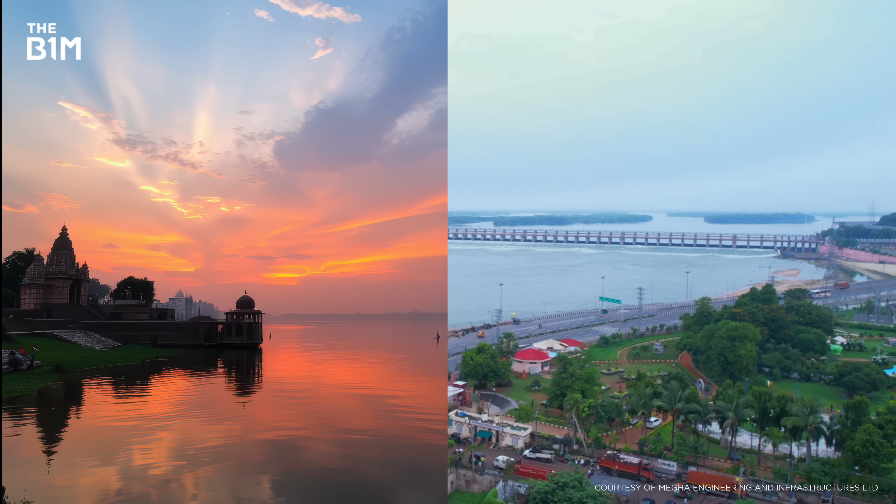This is Andhra Pradesh in India. One of the largest states in the country, it's home to more than 50 million people, 2 enormous rivers, and a thriving agricultural industry. But it's also known for a pair of problems that you wouldn't expect to find in the same place: catastrophic floods and searing droughts.

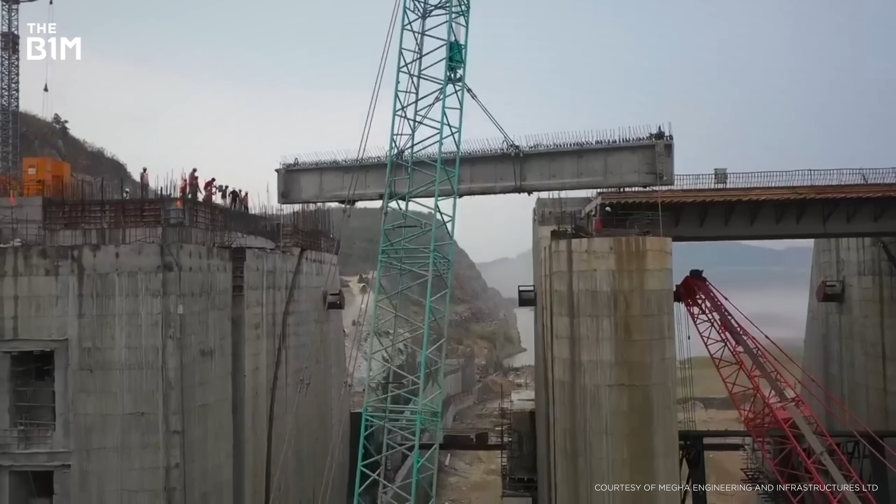For nearly 100 years, engineers and governments have been trying to build something remarkable to address this critical issue. A gigantic project that would transfer water between floods and drought-prone areas, so there's always the right balance. From a record-breaking barrier to a hydropower plant and sprawling canals, the result of a plan that's been around since the Second World War is now in full swing.

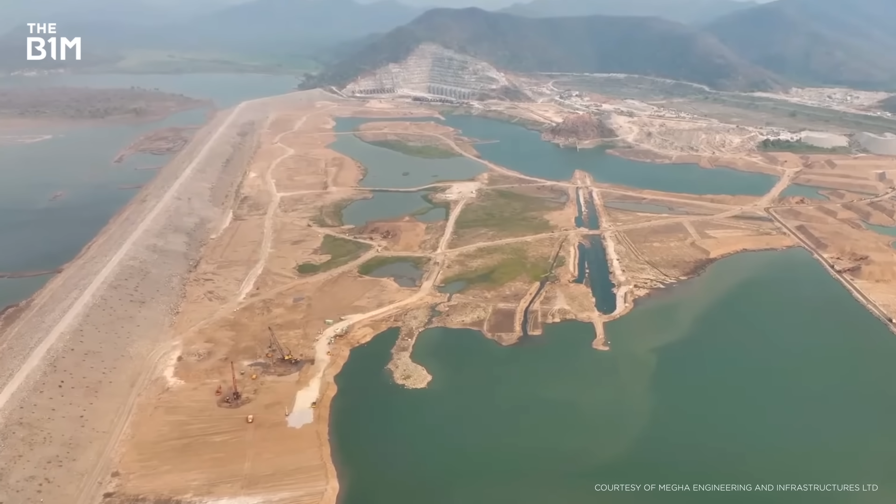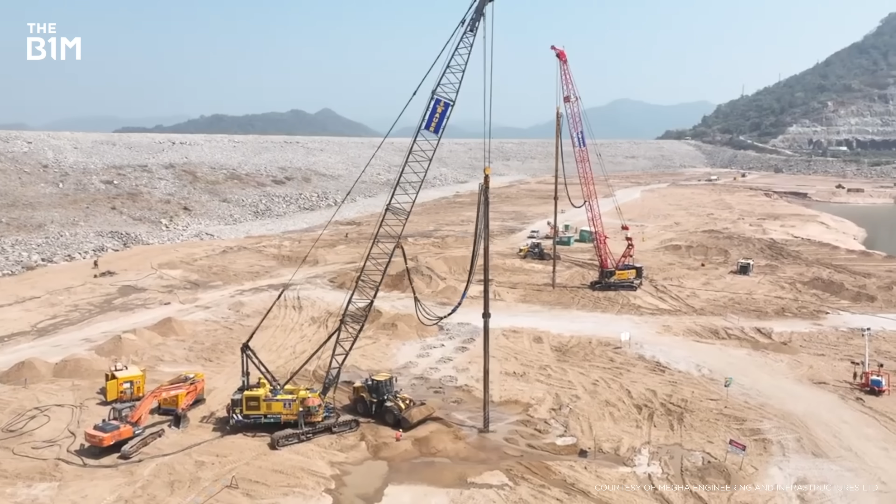But as incredible as it might seem, work here has been tough going. Natural disasters, political clashes, and land acquisition challenges have set this project back by decades. What started out as the lifeline of the region has, at times, looked dead and buried. But now, all hands are on deck to finish a mega build that's already been making some serious waves.

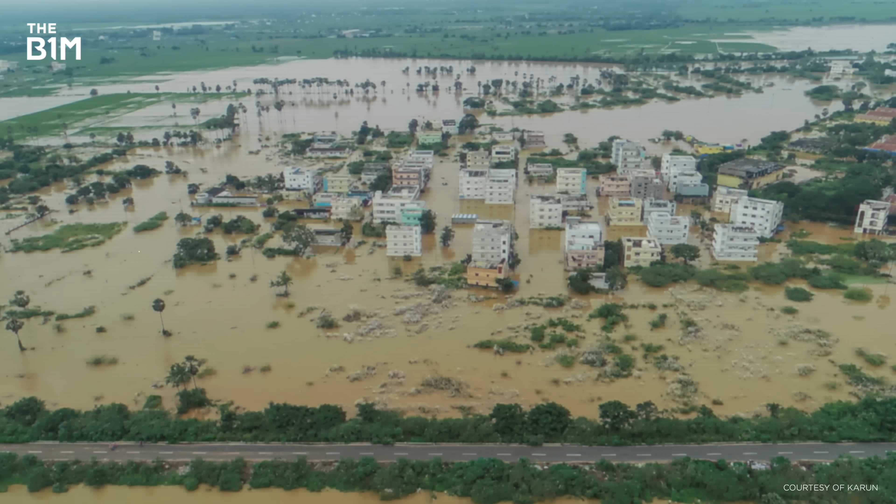Extending for almost 1,000 kilometres along India's southeast coast is Andhra Pradesh. A leading producer of rice and tobacco, the state is highly dependent on the weather. In a tropical monsoon climate like this, however, atmospheric conditions can be extreme. In the central and eastern parts of the region, almost 800,000 hectares of land experience regular flooding. That's an area 5 times as big as London, and in the last 2 decades, things have only gotten worse.

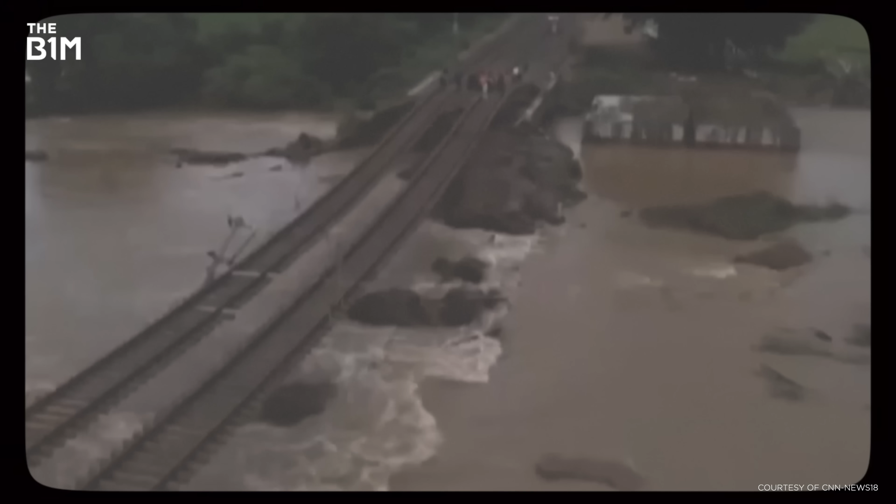2024 saw a flood so devastating that dozens of lives were sadly lost. But meanwhile, there are severe droughts to deal with too. 4 districts further to the west have seen years of sparse rainfall, leading to a decline in crop yields and a lack of drinking water. So we've got one place where there's a surplus of H2O and another where it's in very short supply, all within the same state. If only there was some way to balance this out.

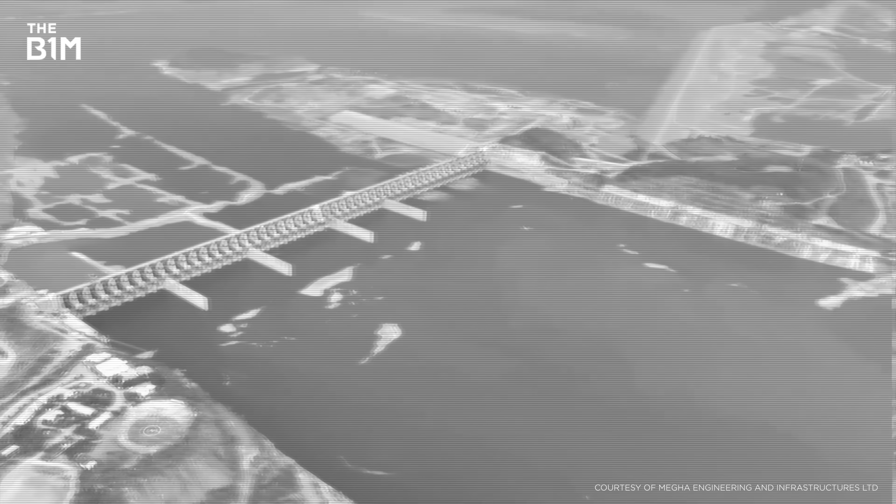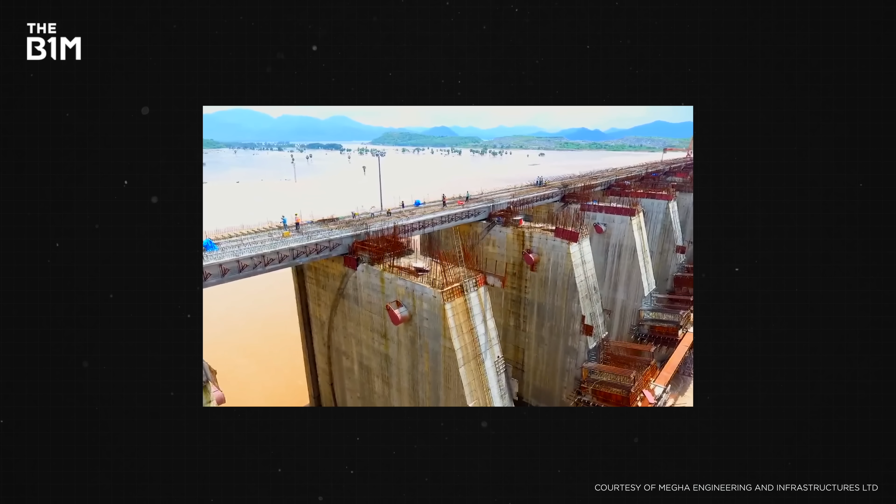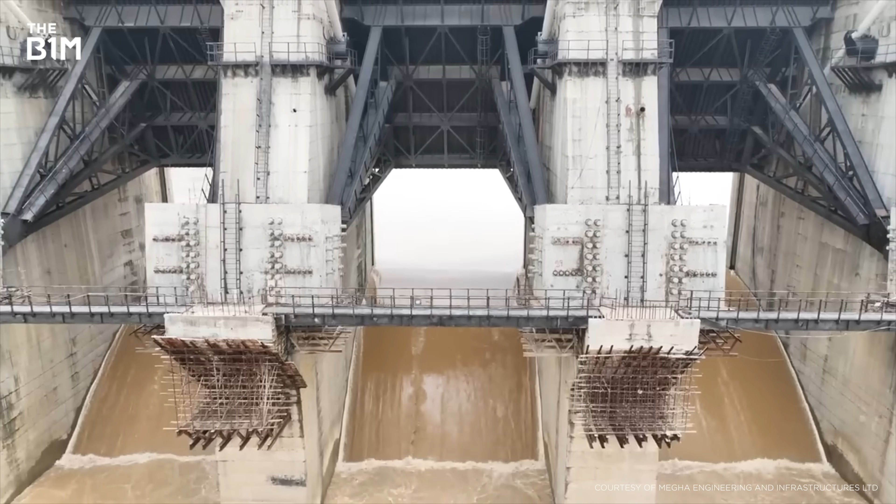Enter the Polavaram Project, stretching for more than 3.5 kilometres across the Godavari, India's second longest river. It'll provide 720,000 acres of land with much needed irrigation, stand as a powerful flood defence, and generate a huge amount of power for the area. This incredible new piece of infrastructure will effectively control this key section of the river. With it, water can be transferred out when levels get too high towards areas that don't have enough water. Now, heads up, there are several parts to this project and all of them are pretty massive.

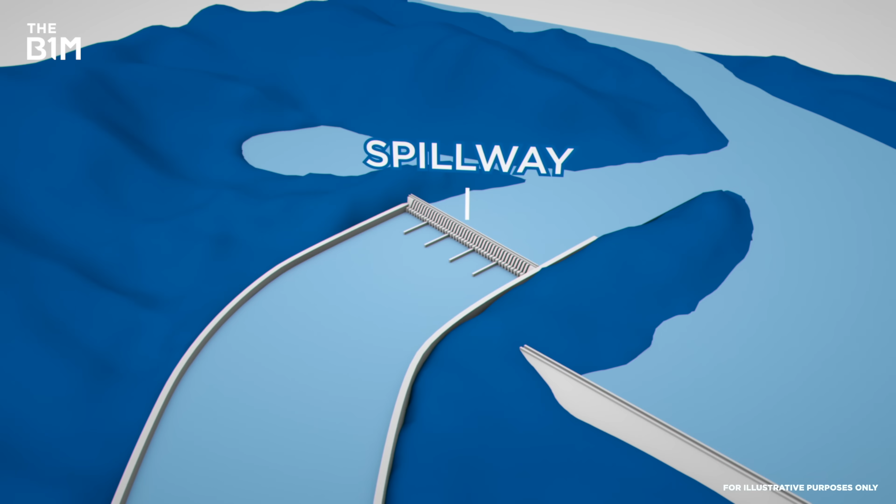We're going to start by looking at the one that's most easily visible, the spillway. More than 50 metres high, it's an immense barrier equipped with 48 hydraulic gates that can let water pass through if necessary, like when flooding is imminent.

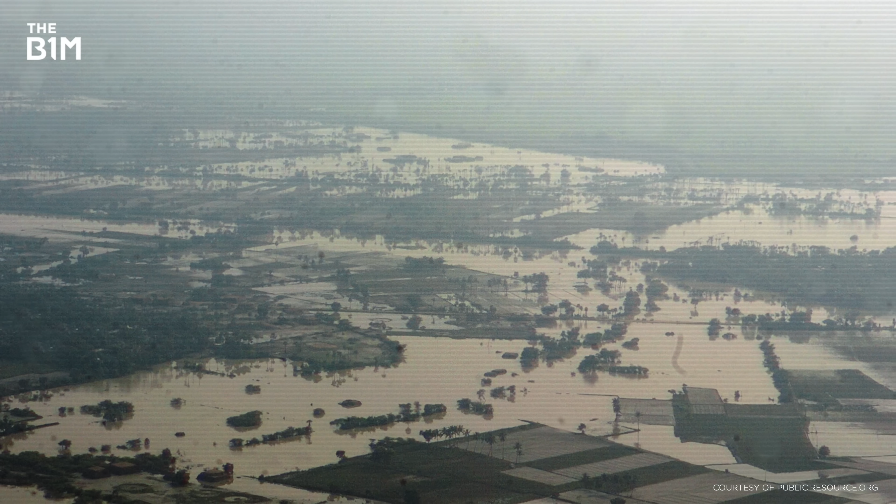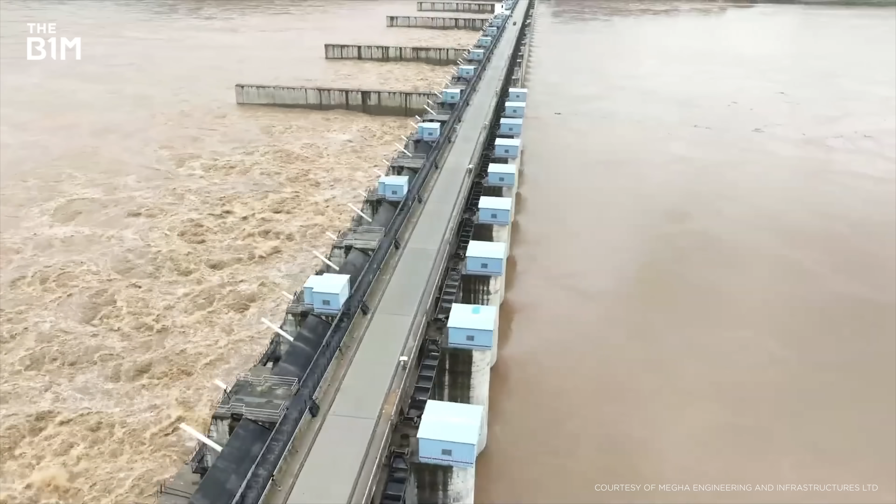And because these disasters can get pretty intense, particularly around the Godavari, planners haven't taken any chances. The structure is built to withstand and protect against the biggest floods possible in the region, the kind that would only be expected once in a millennium. Its discharge capacity of 5 million cusecs is larger than any other spillway on Earth.

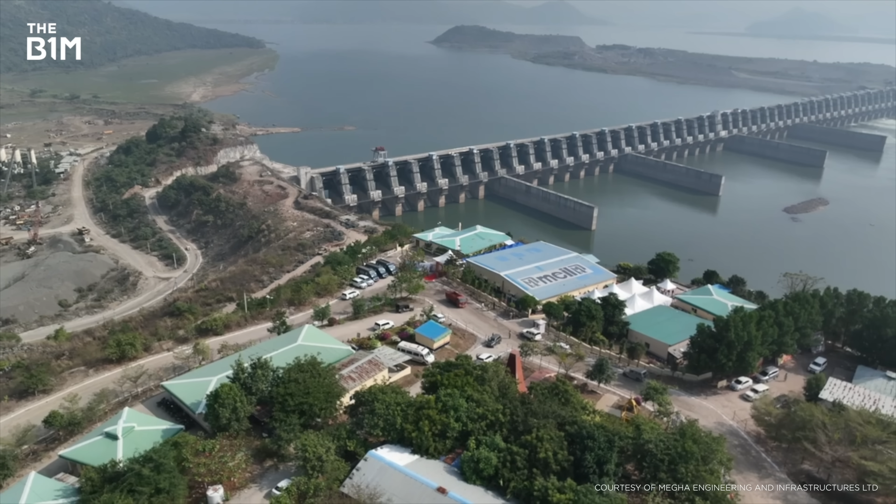In case you need reminding, a cusec is a unit of measuring water equal to 1 cubic foot per second. Measuring just over 1,100 metres horizontally, it's the largest spillway in the world, even beating the one on the Three Gorges Dam in China. Another record was broken during its construction, which had nothing to do with its length.

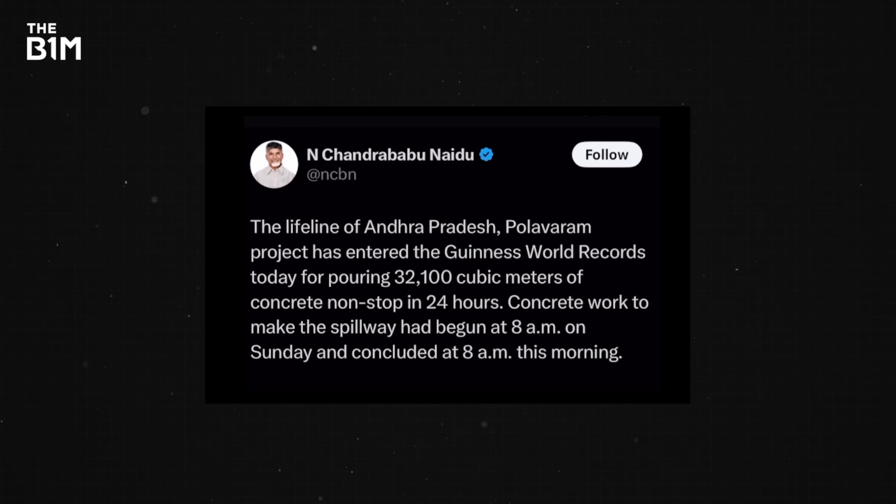In 2019, 32,000 cubic metres of concrete was poured in 24 hours. No other project had ever deposited so much of that material in such a short space of time.

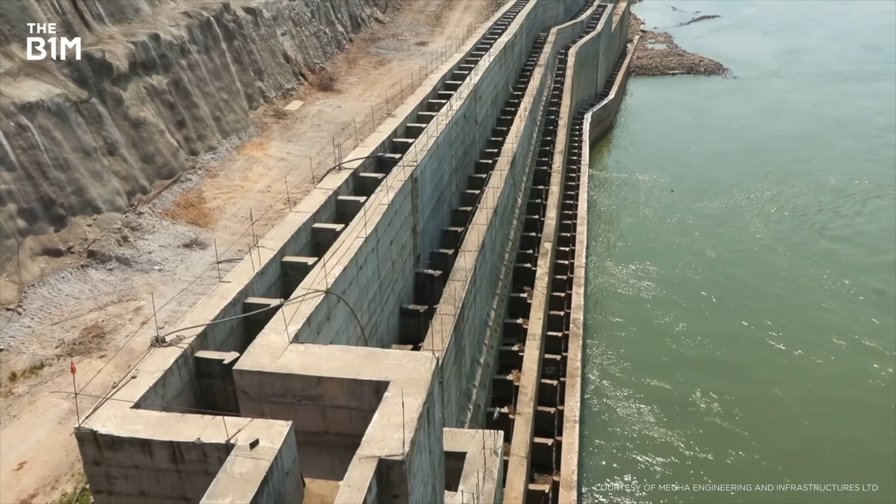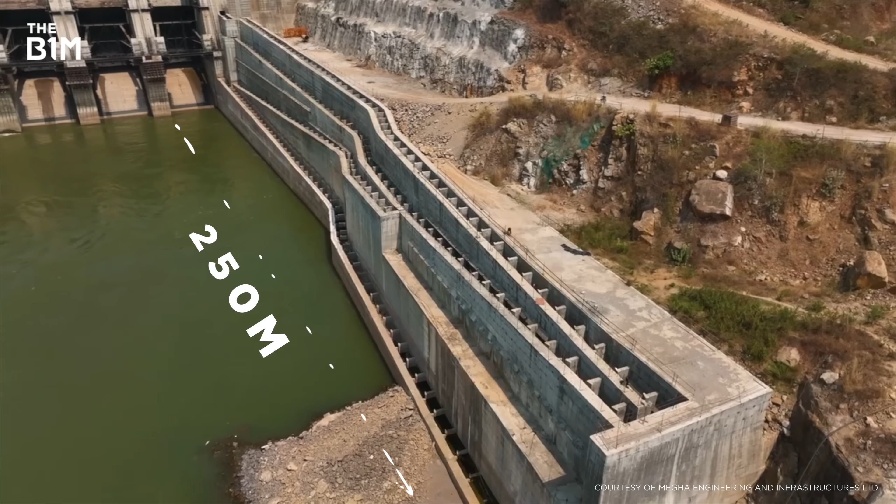Another feature that makes this different from most spillways is the unusual looking structure that's been built to one side of it, the fish ladder. With a total length of more than 250 metres, it allows fish to continue swimming upstream to their breeding grounds during the monsoon season when water levels get very high.

But before any work could start on the spillway, an enormous channel had to be dug out of the riverbank. This created an entirely new watercourse where the flow can be controlled with those moving gates before it's allowed to pass back into the Godavari.

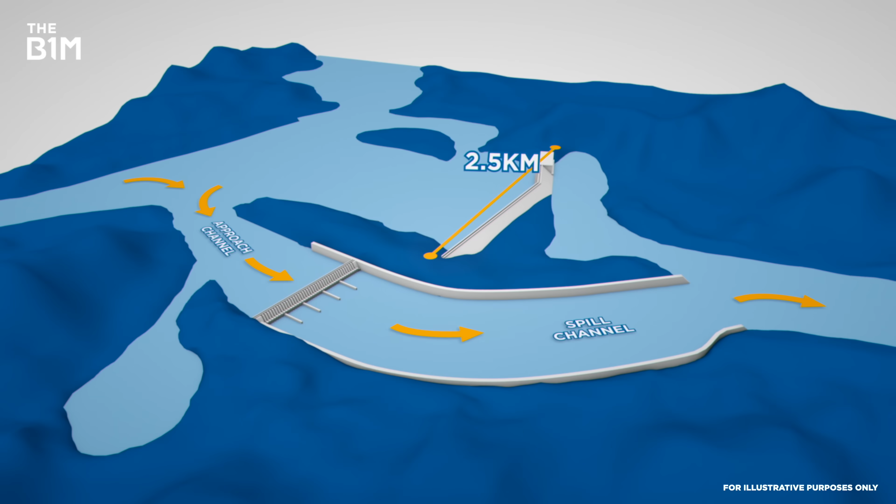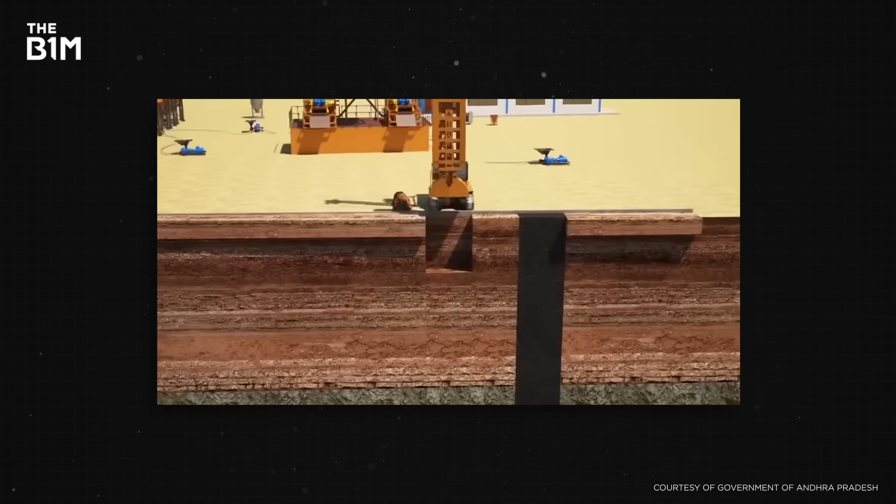As for the dam itself, which is yet to properly begin construction, it'll span almost 2.5 kilometres across the river, roughly parallel to the spillway. Made from a mixture of compacted earth and rock, it's being constructed in 2 phases up to a height of 45 metres. The dam will sit on top of a concrete diaphragm wall built into the ground. Its job is to give the dam stability from all the water pressure sitting behind it while ensuring there are no leaks. But there was a big problem with it.

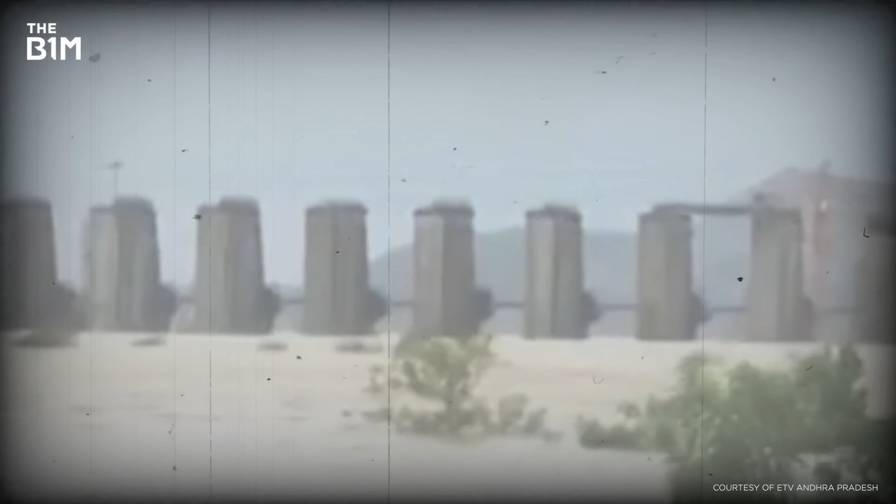In 2019, a huge flood hit the region, causing water to surge right up to the wall, washing some of it away. The damage was so bad the government opted to start again rather than to try and repair it. Work on that is currently underway and needs to be completed by November 2025.

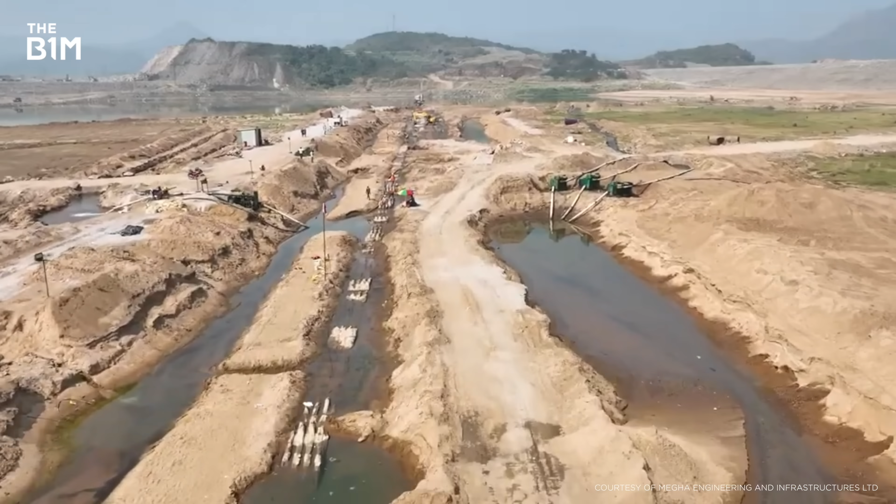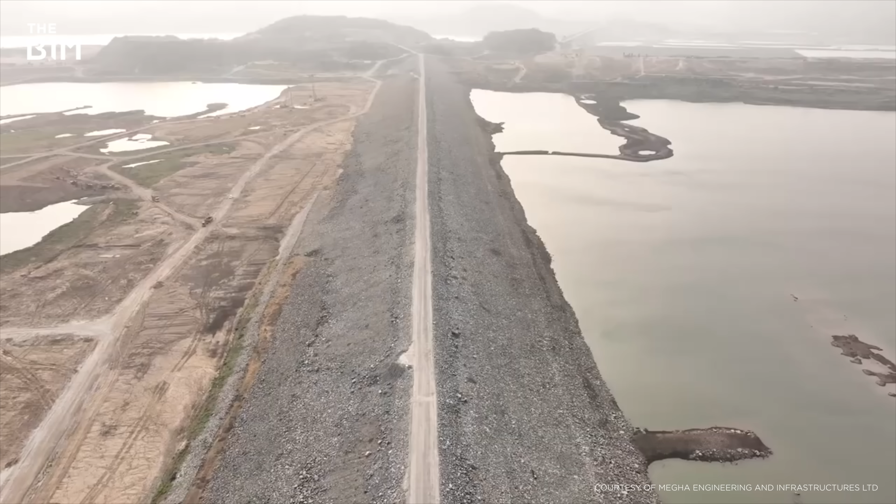Now, building a dam like this can only really be done in a dry area, which is why 2 cofferdams have been put in above and below where the new dam will go. They're supposed to stop water getting in during construction, which is exactly what didn't happen during 2019. To be fair, they were only partially built back then and have since been fully completed.

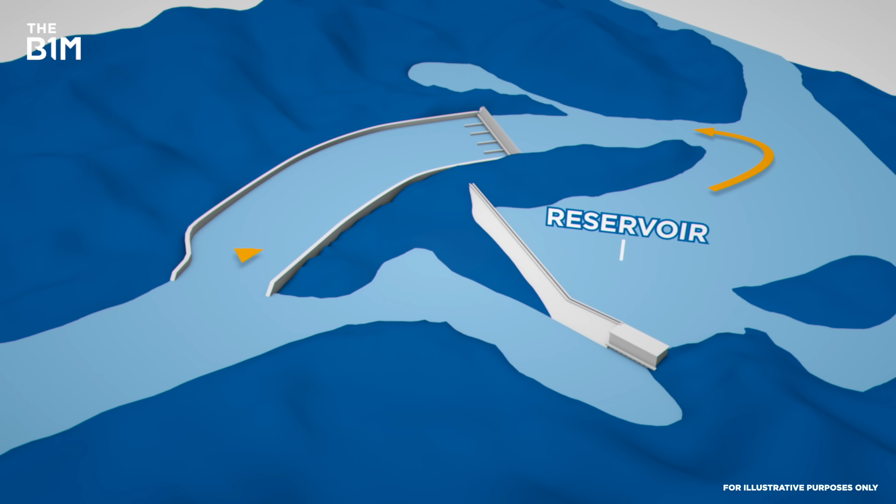Once complete, the dam will help to form a new reservoir as well as direct water to the spillway on its journey down to the Bay of Bengal. But that's not the only route it can take.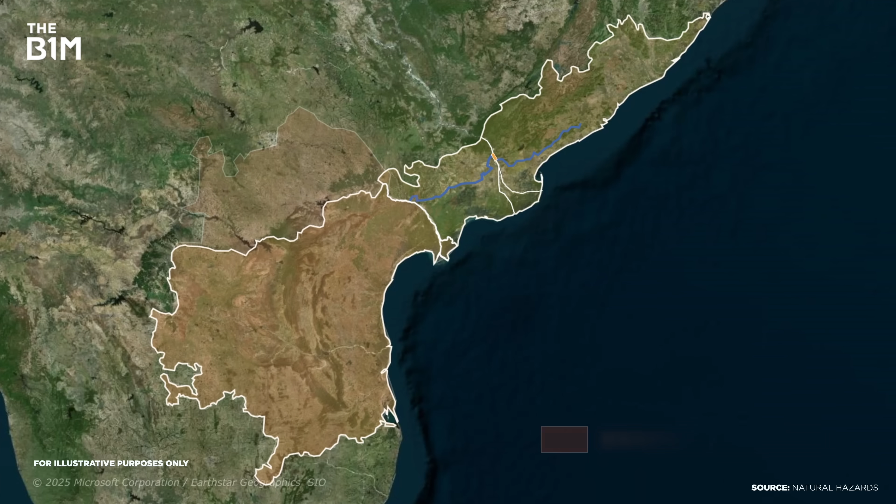The two endpoints of these new canals sit close to some of the state's worst drought hotspots, which are mostly to the west past the Krishna. But not everyone's convinced that damming the river is going to be beneficial to them.

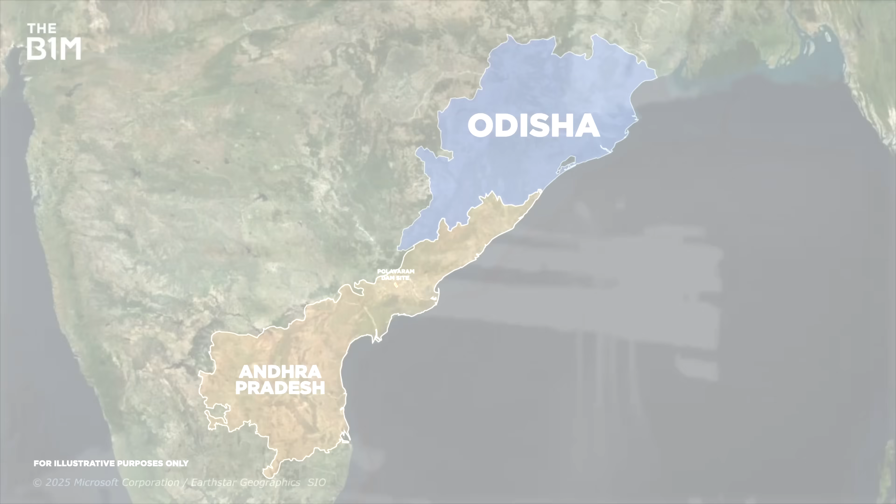Concerns have been raised that several villages in nearby Odisha are at risk of flooding once the project completes due to backwater flowing upstream. Although ideas have been put forward, such as building an extra embankment and providing compensation, an agreement between the local governments has not yet been reached.

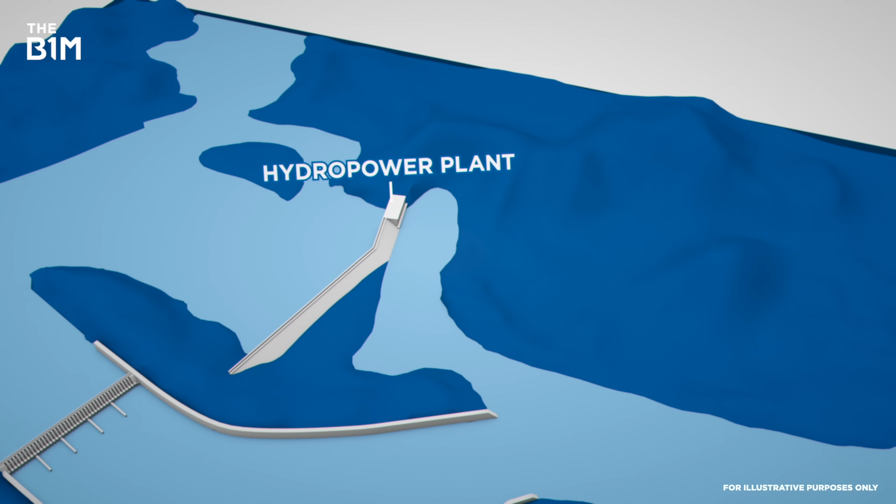Finally, there's the 960 megawatt hydro plant that's being constructed right next to the main dam. Because if you're going to have all that water rushing around, you might as well try and harness some of its power. Despite construction of this being in the early stages, the holes for the penstocks, 150 metres long and 9 metres in diameter, are already clearly visible.

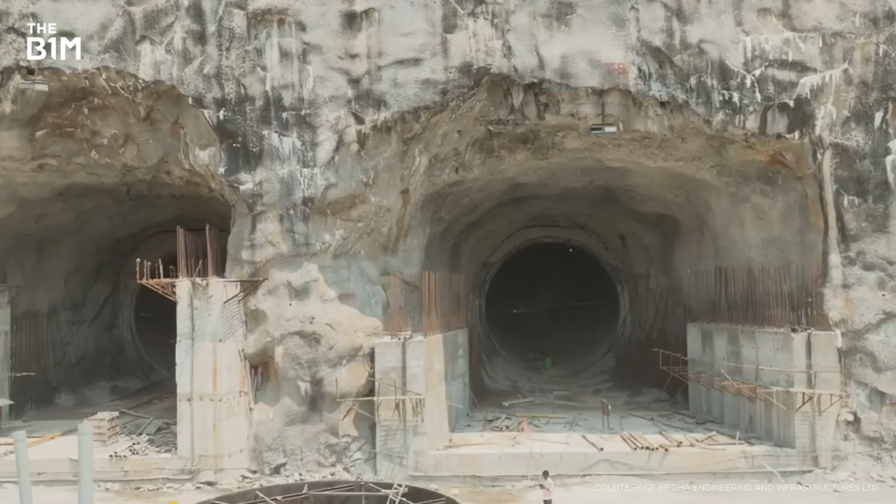A penstock is basically a tunnel that takes water from a reservoir to a turbine, where electricity is generated.

There's a staggering amount of effort going into this scheme, so you can perhaps begin to understand why it's not been a straightforward process. But most wouldn't have expected it to take almost a century to get to where it is today, and still be years away from completion.

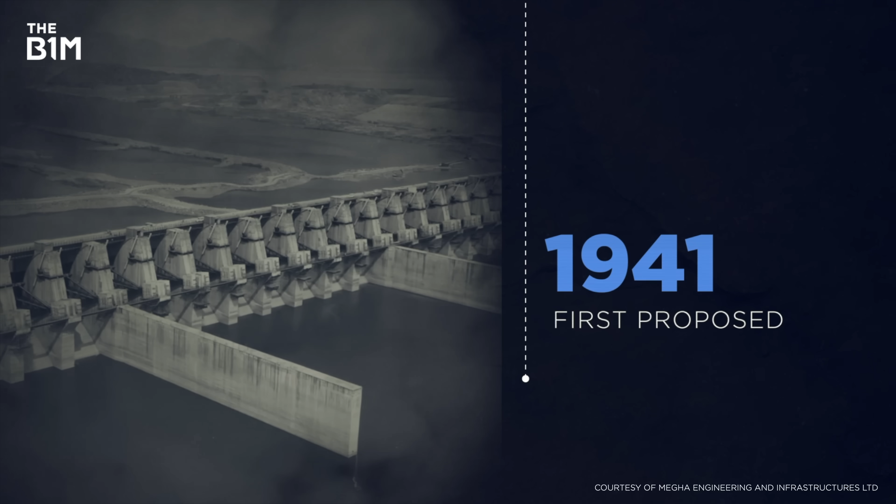The Polavaram Project was originally conceived in the 1940s when India was still part of the British Empire, but it wasn't until 1981 that the foundation stone was laid, and then work didn't properly start until 2004.

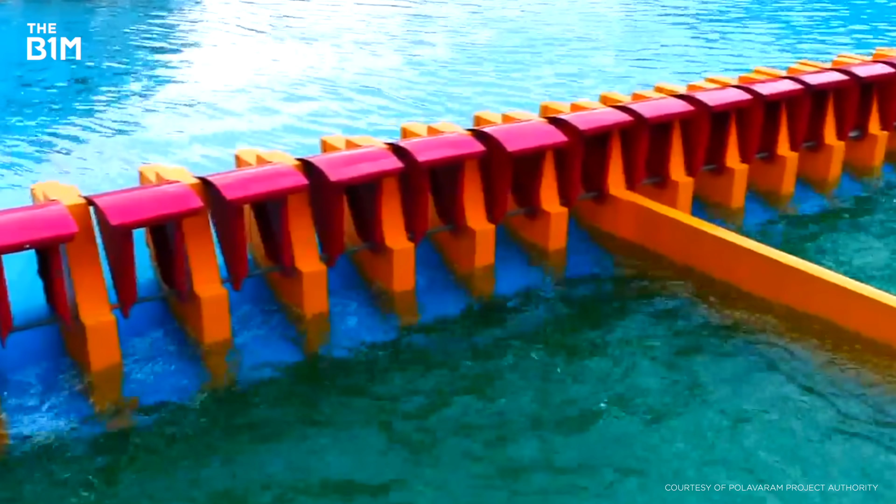The next few years were mostly spent on the design, land acquisition, and getting approvals from multiple government departments, which took a lot longer than planned.

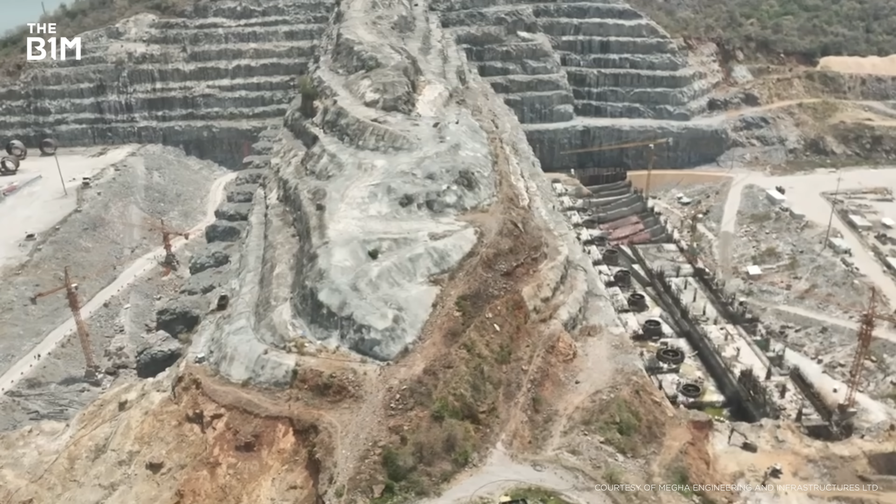Another decade passed before actual construction began at the main site. It had just been given national project status by India's central government and a target finish date of 2018. But as you can see from this recent footage, that deadline has been missed by a long way.

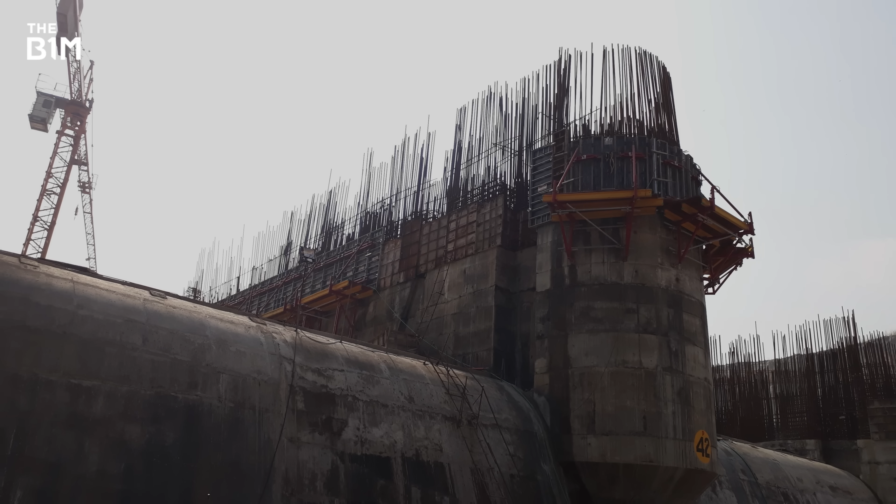The question then is, what's caused this project to veer so far off course overall when some aspects, like the pouring of concrete, seem to be going smoothly? Well, in truth, it's a combination of things.

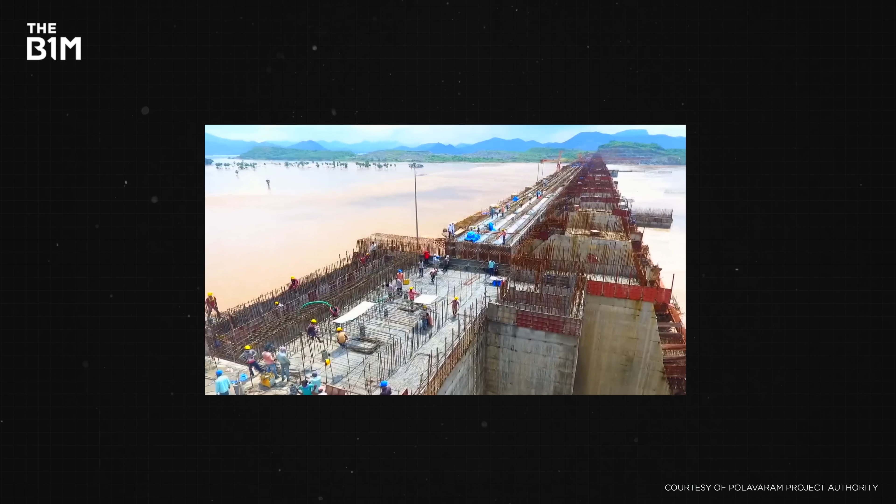Firstly, acquiring all the land has been difficult, and it's not hard to see why when you consider the impact on the local population. Unfortunately, to build a project that could benefit millions, some have to make some very big sacrifices. Whole communities have been relocated because their homes stood in the way of the construction or the new bodies of water being created. We're talking at least 200,000 people.

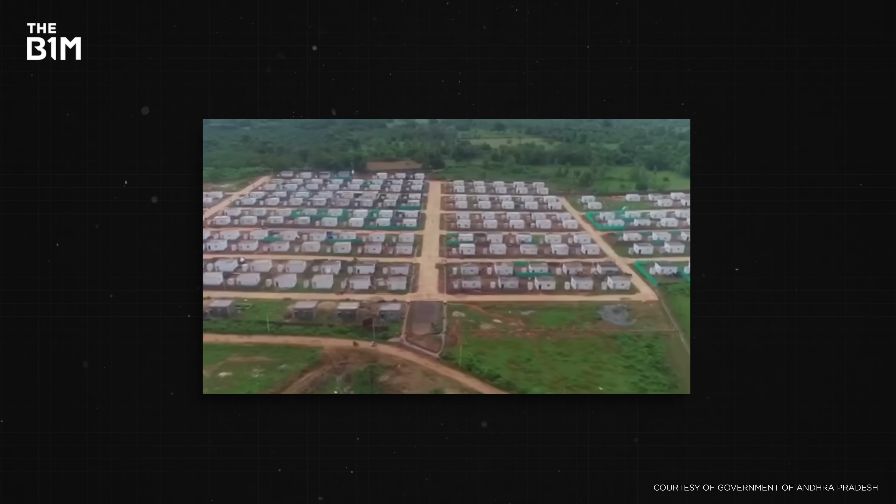Organising permanent new places to live for so many individuals has not been easy, especially when around half are from tribes that have lived in the same area for generations.

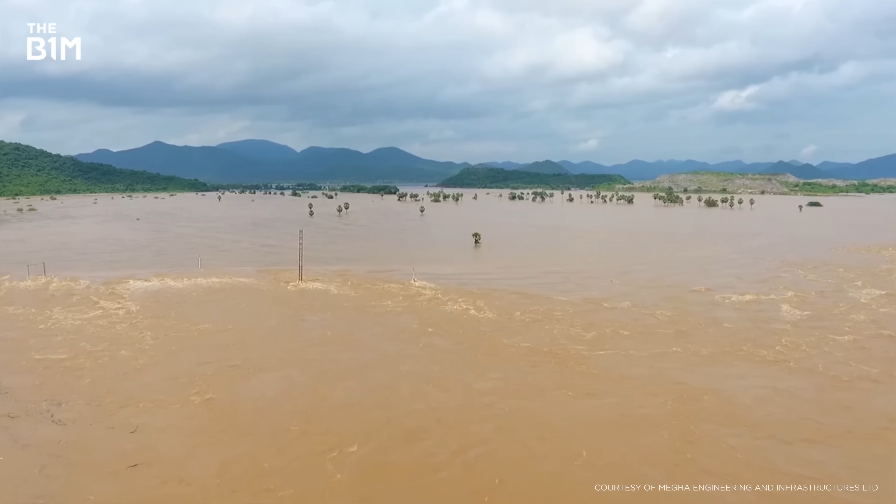Vast areas of forests are being submerged to build this project, and there have been those disputes with neighbouring states as well. Thirdly, changes in local government haven't exactly helped matters.

Rival parties have been quick to blame each other for the lack of headway. After his recent re-election, the region's chief minister, Chandrababu Naidu, claimed his predecessor oversaw progress of less than 4% in his 5 years in office.

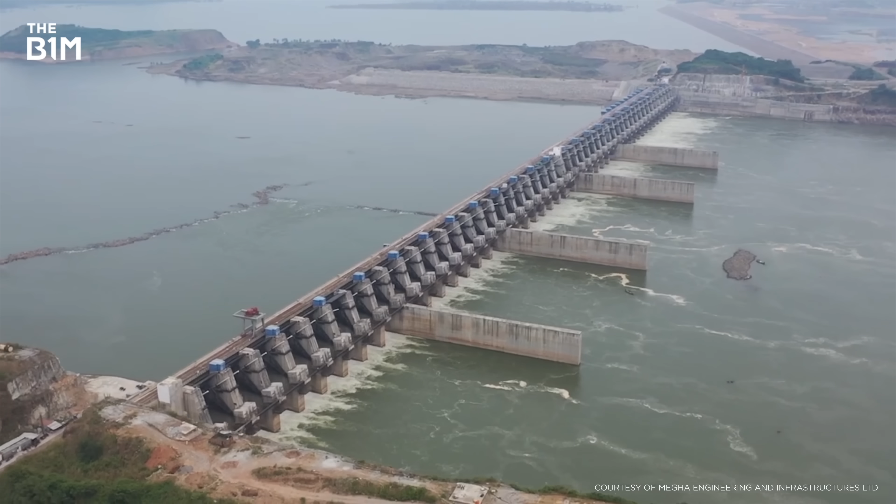Finally, the main contractor has been changed twice. Megha Engineering and Infrastructures Limited is now in charge of the construction, but the fact they haven't been from the beginning has caused delays. These factors, along with inflation, complying with new environmental regulations, and changes to the design and scope of the project have had an impact on the cost too.

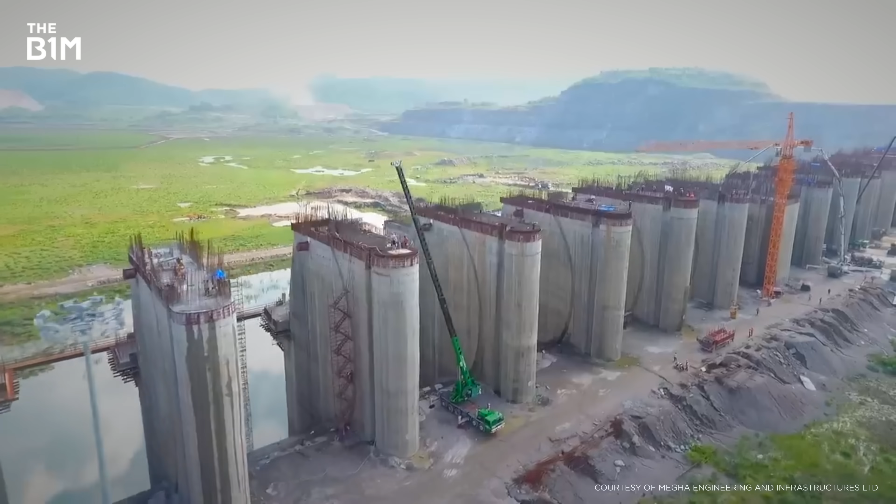When construction began more than 20 years ago, $1.5 billion was the estimate. The latest total is around $3.5 billion, but at one point it was more than $6 billion.

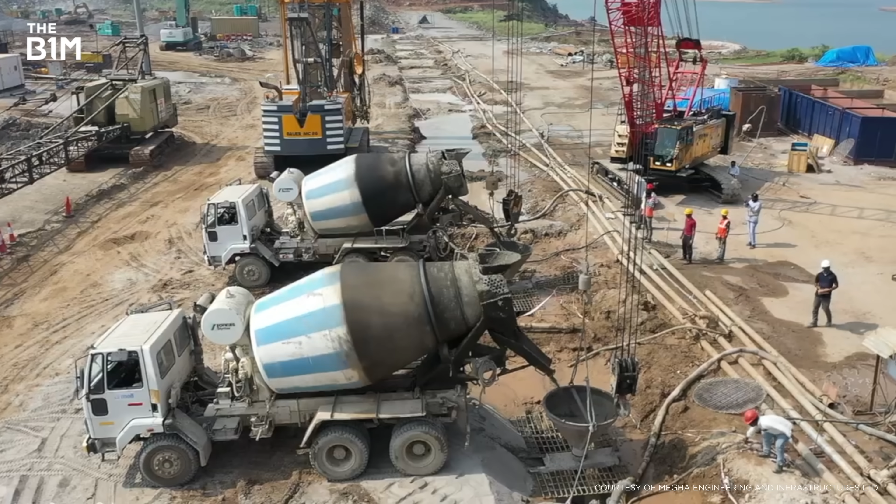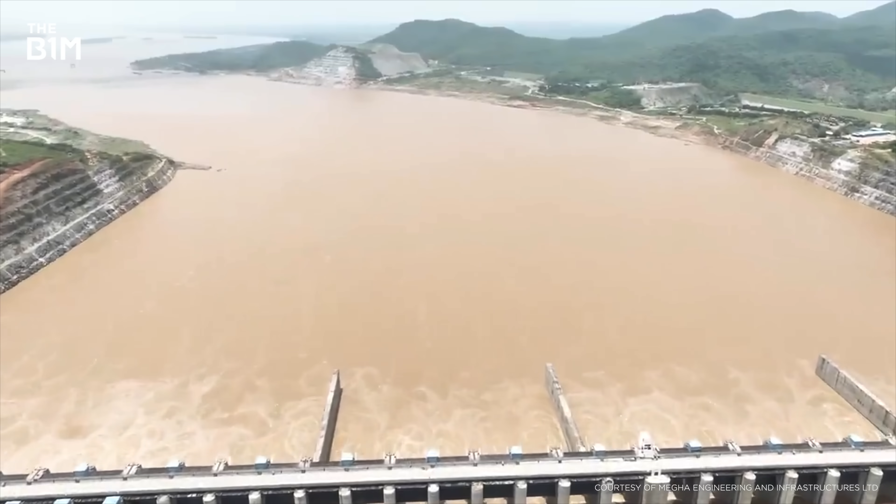Now the pressure is on to wrap things up once and for all. In late 2024, Naidu declared the project must be completed by 2027, with Phase 1 of the dam finished no later than October 2026. At a media briefing, the state's Minister for Water Resources said his boss had made it clear there should be no more deviation from the plan, not even by 1 hour.

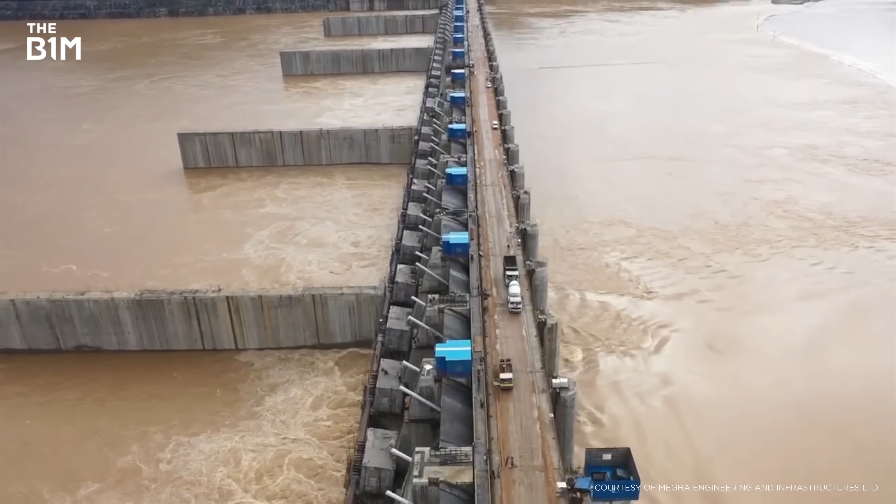With this strict new target in place, hopefully the people of this region will soon see the completion of this critical scheme that's been going on for far too long.

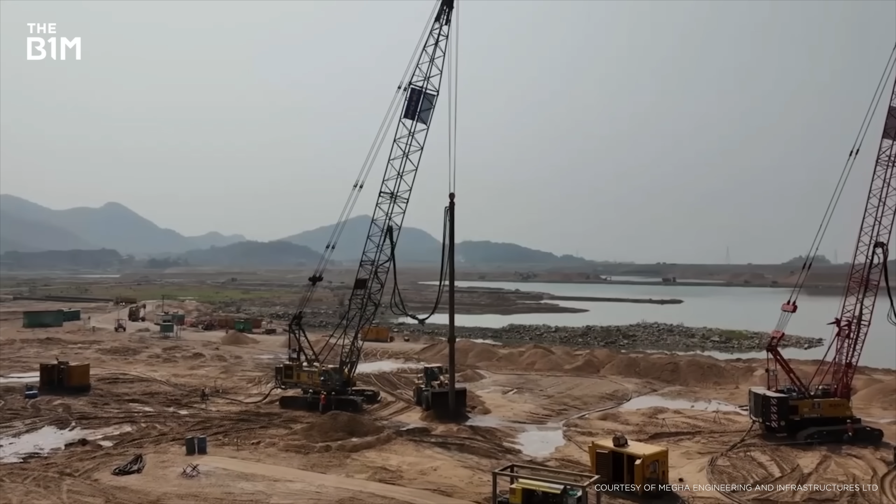A piece of new infrastructure this large and complicated was always going to be difficult to deliver, but the Polavaram Project has at times been more of a liability than a lifeline. When it finally crosses the finish line and future floods and droughts hit the region, we'll know whether it's been worth the wait.